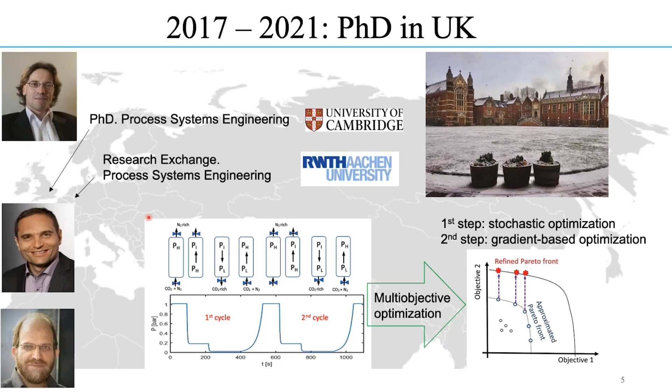And for today's topic, I'm going to talk about... okay, sorry, today's I'm... right here, there's something, yeah.

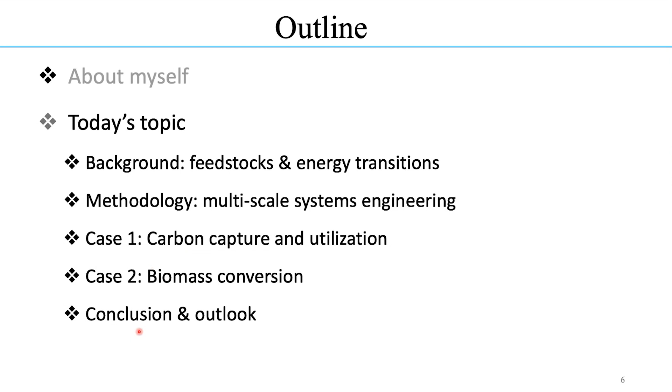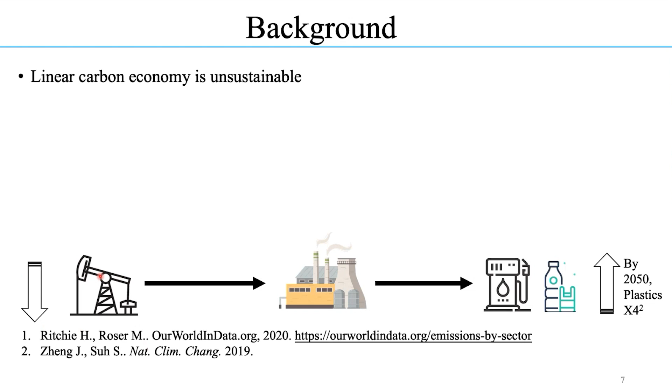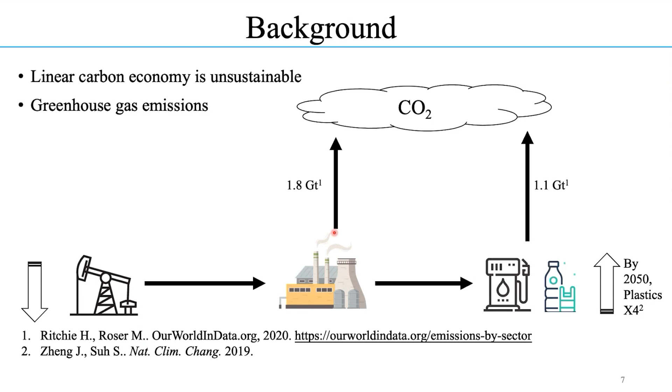Currently, the carbon-based industry is unsustainable. The way it works is a linear production process, starting from fossil fuel. Fossil fuel is not renewable, so the whole storage is decreasing. But in between, when they produce products like plastics or fuels, that also causes greenhouse gas emissions. So this linear way is, of course, not good.

To tackle this challenge, what people normally do is the 3R approach: reduce, reuse, and recycle. That's what environmental engineering generally does. From a chemical engineering perspective, what we are doing is trying to develop carbon capture technology, and also trying to develop renewable carbons like biomass. These are the two cases, two case studies I will talk about later on.

Another thing, probably you know it very well, is for net zero, when we talk about greenhouse gas emissions in different sectors, we can see around 75% of greenhouse gas emissions come from the energy sectors. So net zero, to a large extent, is energy transition.

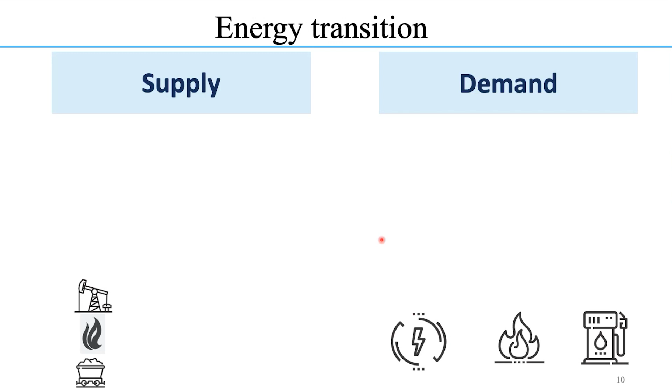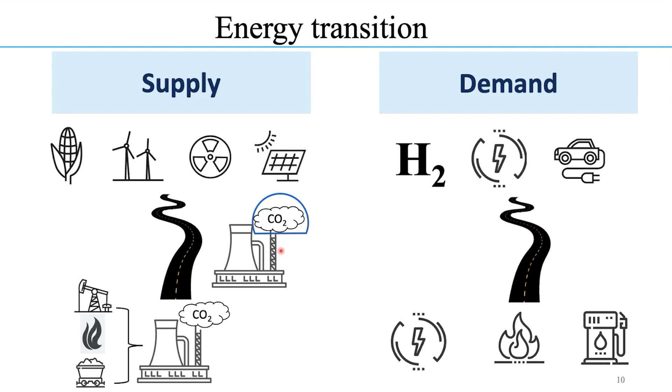Energy transition can be achieved from two sides: from the supply side, transitioning to renewables, and the demand side, through the hydrogen economy or electrifying industry sectors and heating sectors. But the reason carbon capture technology is still needed, at least for the short term, is that maybe not in the EU or Norway, but in fossil-dominant regions like Germany or China, they still need to use coal or gas for power generation. To decarbonize these power plants, we need carbon capture technology to reduce greenhouse gas emissions.

Talking about the methodology we're going to use, that's kind of multi-scale system engineering. Basically that's kind of different scales. First in lab scale, we're trying to find innovations that can change the world or change the whole

carbon transition and energy transition solutions. For example, carbon transition is trying to convert CO2 to fuel products. We develop in chemical engineering, by photocatalyst and electricity or some novel catalyst to

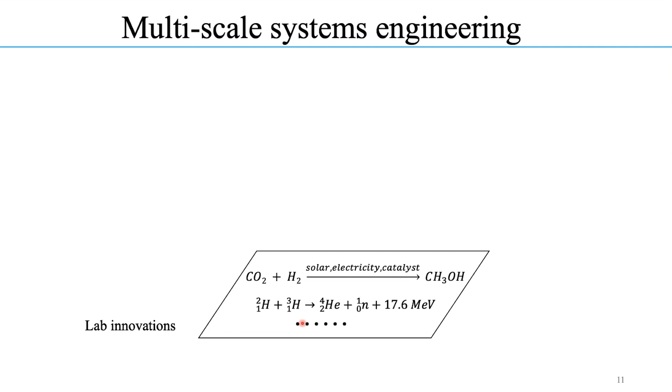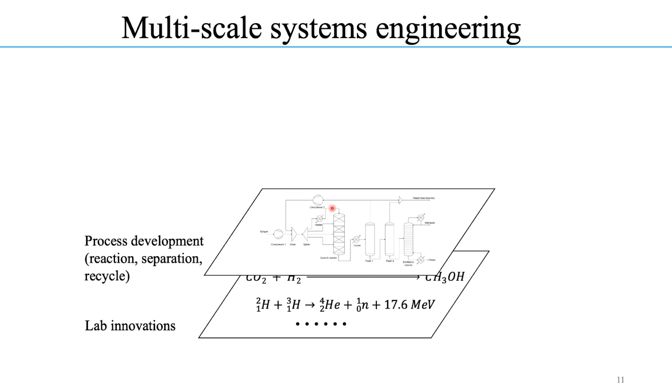achieve this step, and also for the energy sector, try to do something like controllable nuclear technology. Then in process development, we're trying to do process design, develop reaction, separation, and recycle, trying to develop a good, robust process. Then in the whole supply chain level, we go to the regions and the global, trying to do overall system engineering. Finally, we talk about sustainability, which should follow subject to economic and environmental

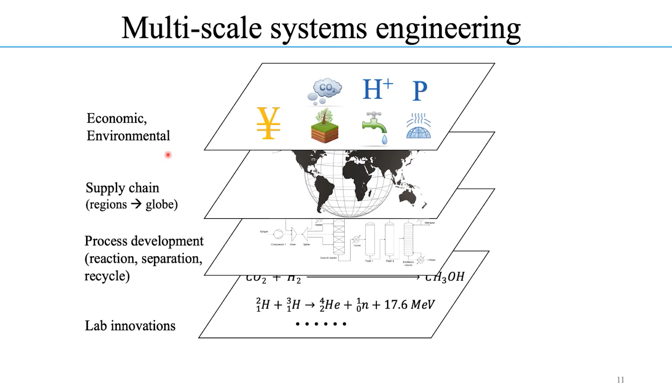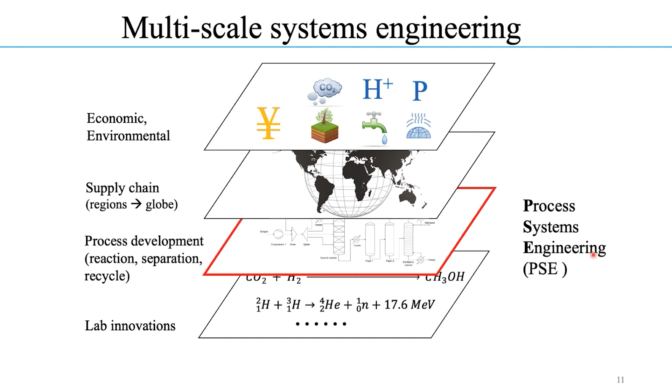constraints or objectives. But today, because my field is chemical engineering, most of my work is focused on process development, and specifically that system engineering field is called process systems engineering, or PSE.

Specifically, PSE is kind of a tool. What this tool can do is facilitate scale-up decisions from lab scales to industry scales.

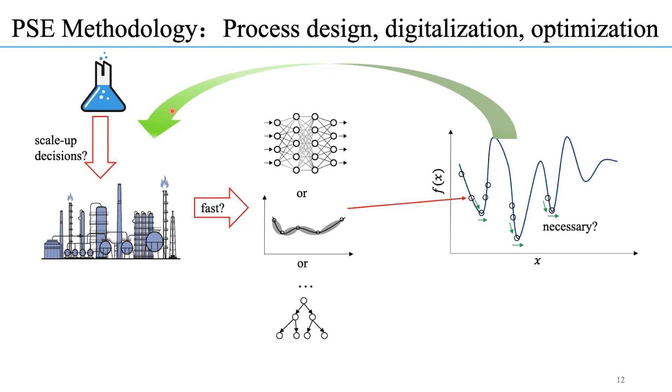Then what we do is digitalize this chemical process using current machine learning technologies, and eventually we do optimization. Then we go back to validate the model and also to accelerate the scale-up

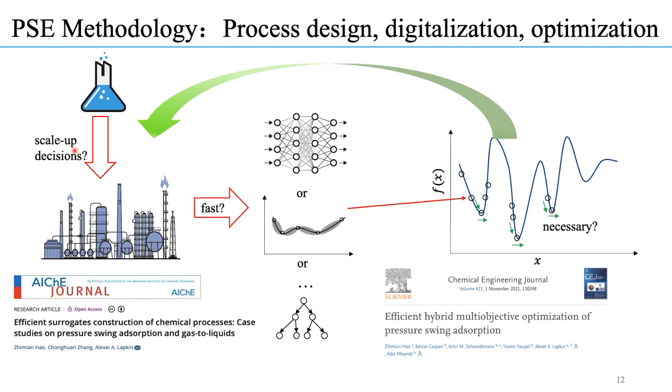decisions. This methodology, I published these papers in the AIChE journal and chemical engineering journal - that's mostly for the methodology. And with this tool, we are trying to solve some problems.

The first case study is what I was doing during my PhD: digitalization and optimization of carbon capture and utilization.

The full chain for the carbon capture technology is called, you probably know, carbon capture, utilization, and storage. Basically what that means is for the carbon source, normally, for example, flue gas in the power plant, then we capture it. Capture means to concentrate the CO2

The second way is trying to convert the captured CO2 to a fuels product, or cement, or plastic. And today's talk, we are trying to focus on this captured CO2 to fuels product pathway. That's the system boundary in this case study.

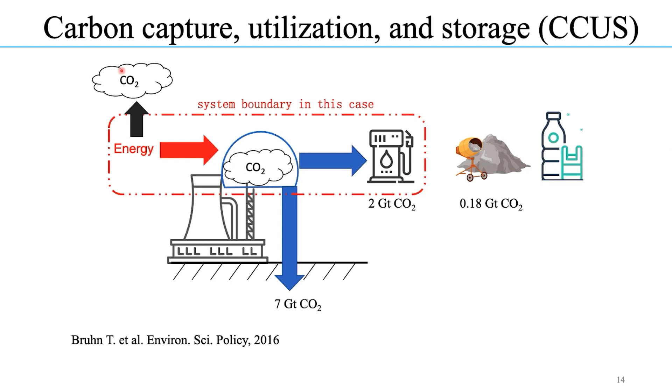Another thing we must understand is that such a pathway also needs energy, and this energy can also cause CO2 emissions. Let's also introduce the research questions.

Just now we talked about how net zero can be equivalent to energy transition. Energy transition technically should be from fossil fuels to renewables. And the reason we use carbon capture technology is we try to decarbonize the fossil fuels.

But currently in academics, especially for the CCU field, people normally consider a general assumption - academics assume they will produce hydrogen from wind or solar, using wind for electrolysis to get the hydrogen, and the hydrogen combined with CO2 to convert

to the fuels. But as we know, this kind of renewable energy can be converted for electric cars and heat pumps, or directly go into the grid. People also mention that the decarbonization efficiency of the routes above is actually much better than the routes below.

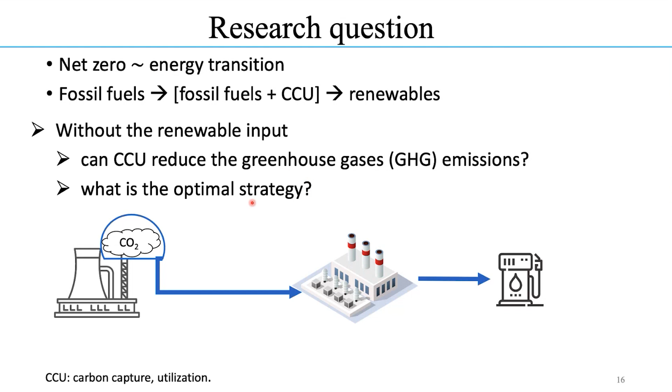So let's go to a more realistic approach. We just say, okay, without the renewable inputs, we want to know whether CCU can reduce greenhouse gas emissions or not. And if this can reduce greenhouse gas emissions, then what will be the optimal strategy? Under such a research question, we designed this industry park.

In this industry park, we include two natural gas power plants with two carbon capture technologies. This capture technology will capture CO2 which will be converted by Fischer-Tropsch and methanol synthesis to get

the fuels product. As you see here, the CO2 conversion needs hydrogen, but the hydrogen comes from steam reforming. So once again, there's no renewables input.

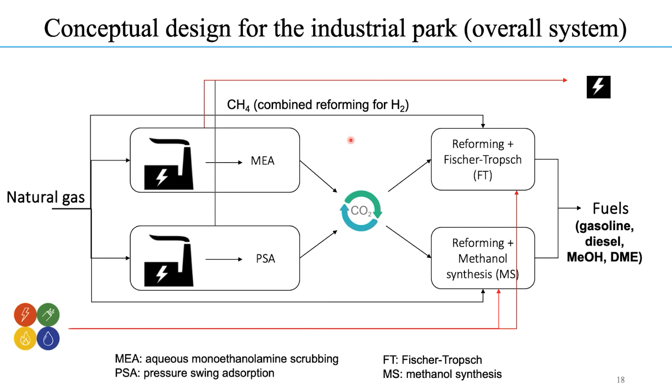For example, for the PSA, we can change the pressure and duration for each stage, and also how we distribute the CO2 to different pathways. ZFT means the portion of CO2 going to the FT routes, and 1 minus ZFT means going to the methanol pathway. We also consider that part of the heating can be provided by low carbon electricity.

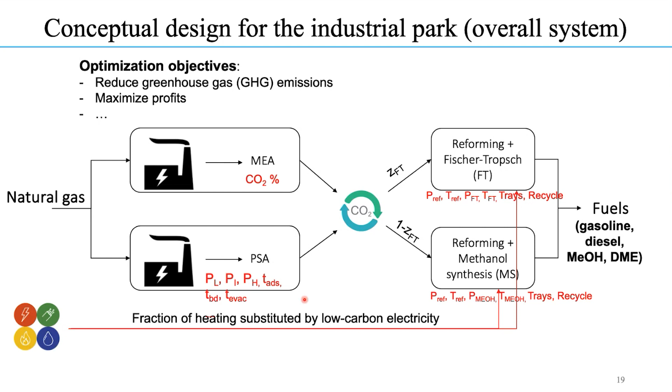When we try to optimize these things, we did process modeling for each sector. For example, for each sector there's a tailored simulator. We try to simulate the subsystem, but we come across some optimization challenges.

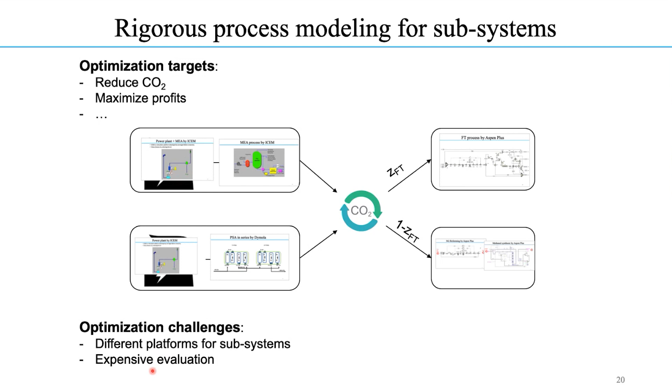For a subsystem, they have a different simulation platform, and with these rigorous simulations, one evaluation can be very expensive. So our way is to use a kind of machine learning based model to represent those systems. This way we can achieve the overall system at one platform, and it's cheap for the optimization evaluation.

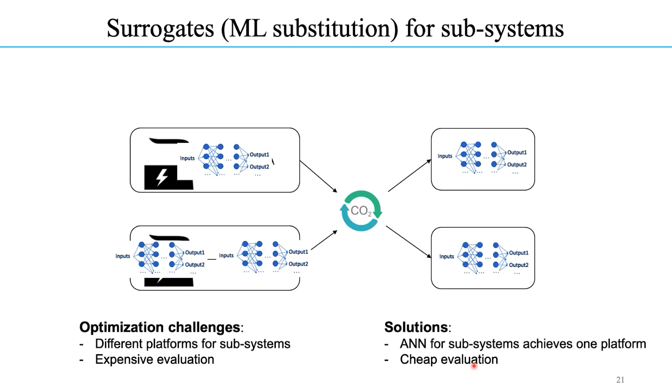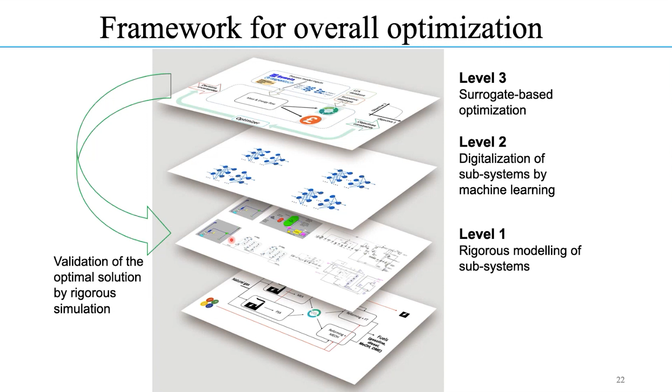So that's the overall framework for the optimization. Level one is still building a rigorous model using rigorous commercial simulators. In level two we digitalize the whole system using machine learning. Then in level three we do surrogate-based optimization, and eventually we validate the results using commercial software for final validation.

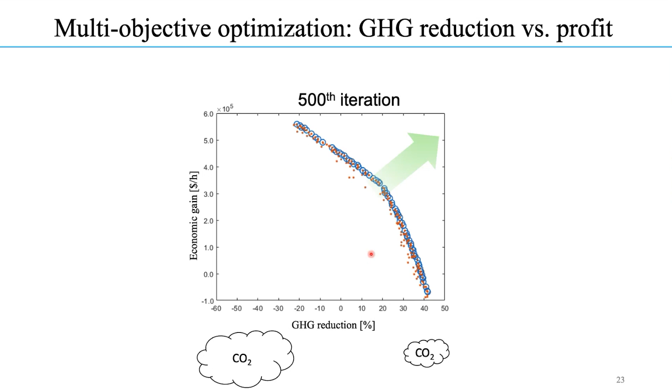This is the kind of result from the multi-objective optimization. The first iteration means when we don't do any optimization - each result is one objective, the x-axis is greenhouse gas reduction, and the y-axis is profit. The red points are available results, and the blue circle means the best case. As we optimize through 5 iterations, 10 iterations, and eventually stop at 500 iterations, we find it's very difficult to improve further.

In this case, when we try to pursue very low greenhouse gas emissions, the corresponding economic gain or profit for the industrial park is actually negative - basically that means the whole industrial park is losing money. If we try to pursue a very high profit instead, we find the greenhouse gas emission reduction is negative. That means converting this CO2 to a useful product actually costs more energy and causes more greenhouse gas emissions. So basically, the CCU actually increases the greenhouse gas emissions.

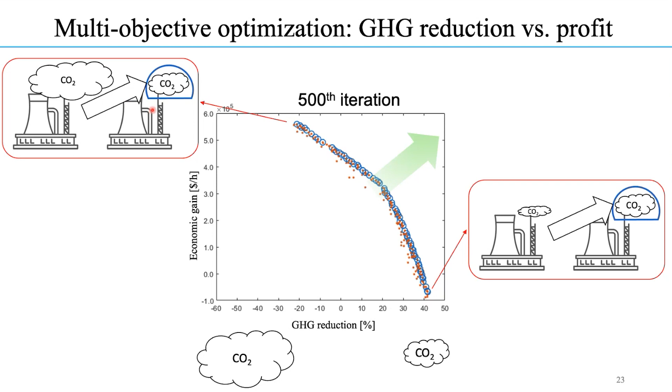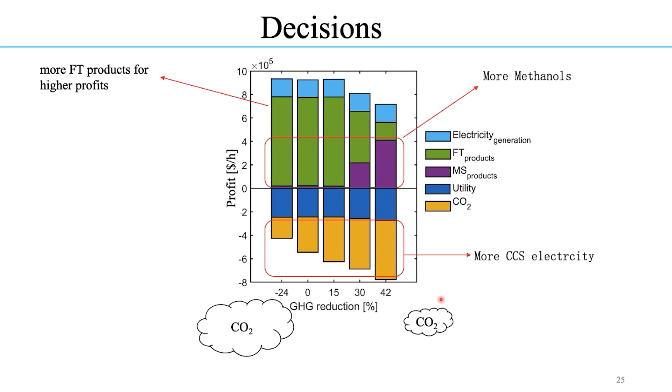If we check the reason why, we selected 5 points - you can see on the left side, those have more Fischer-Tropsch product, meaning more gasoline and diesel. That gives more profit but costs more emissions. On the right, there are more methanol products, which means it reduces more emissions, but also means using more CCS electricity.

So going back to the previous question - can optimization, without renewable inputs, allow CCU to reduce greenhouse gas emissions? The answer is: an optimal CCU is capable of decarbonizing the power plant, but not at maximum profit. And as you may remember, without optimization, a random design can actually cause more greenhouse gas emissions. That's really bad - so basically you try to use CCU to reduce CO2 emissions, but it actually costs more.

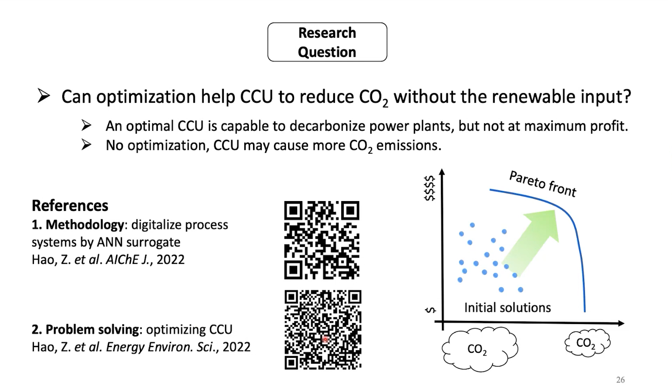If you are interested in this digitalization technology, you can refer to the first barcode, and for the whole optimization problem you can refer to the second barcode for my published paper.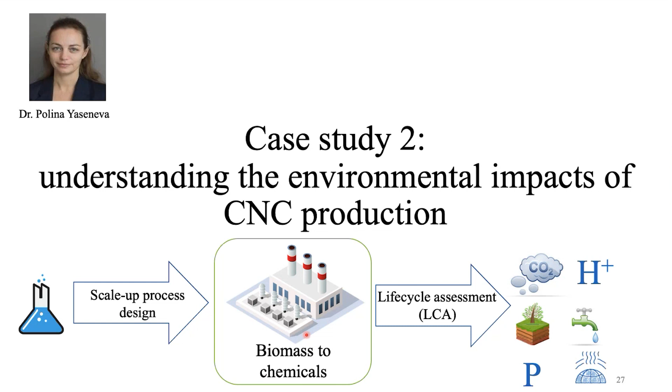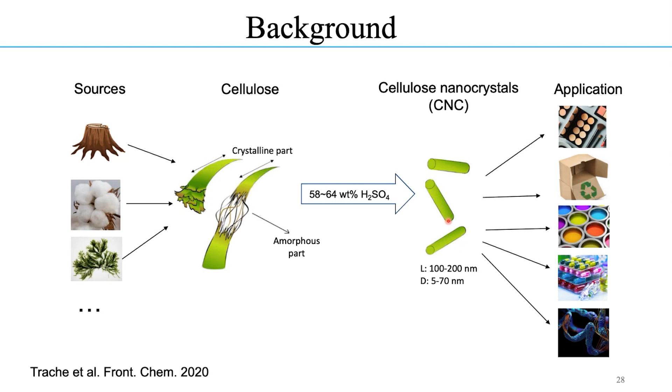The second case study is about biomass conversion, basically trying to scale up lab-scale processes. It starts from biomass, where we try to produce cellulose nanocrystals. Basically, it's a kind of high value-added product with many applications.

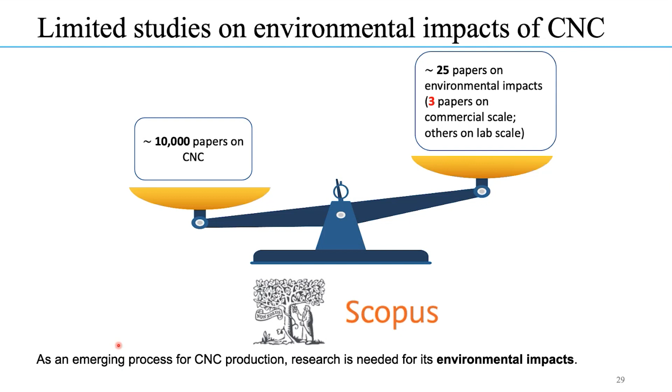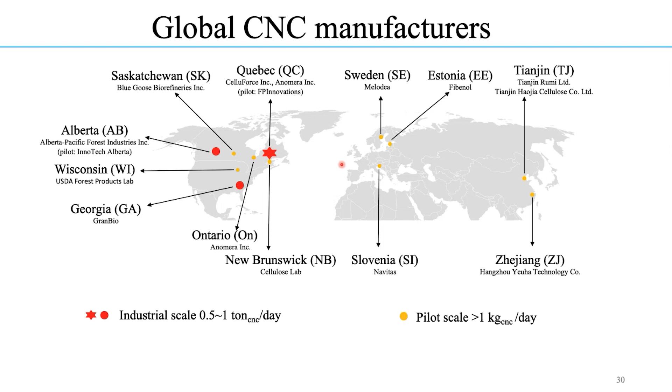But so far there's very limited research in this field about environmental impact, because this is a kind of emerging process and the information is very limited. Still, manufacturers have spread all over the world - the largest plant is in Quebec, Canada, and there are also some pilot plants in other European countries and in Asia.

Firstly, we try to look at this process in Quebec, where they have the largest plant. Basically, this process is actually very simple.

Start from the cellulose, and then finally we try to produce the CNC. So that's the product. In the process, we need to add the acid and water, and eventually we need sodium hydroxide to neutralize the waste stream to pH 7. We are considering a circular design to recycle the acid and water. This way, we can reduce the acid and water use and also reduce the sodium hydroxide. But the cost is increased energy consumption.

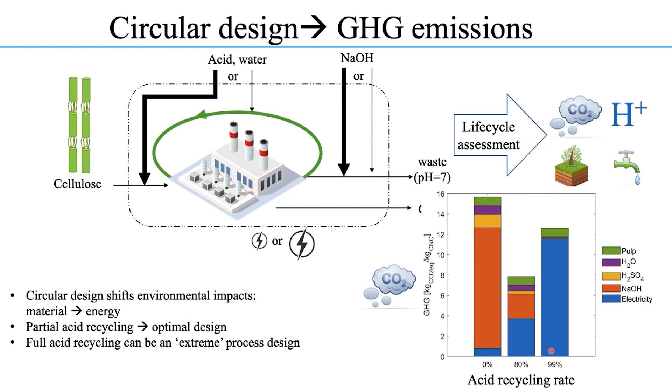Then we try to do a life cycle assessment to check environmental impacts. Here's the result we found: the circular design shifts environmental impacts from the materials input to energy. You can see with no acid recycling, there's a lot of input from materials like sodium hydroxide. When we recycle more acid, there's a lot of burden from the electricity. We also found that partial acid recycling is actually the best, because full acid recycling, like 99%, is kind of an extreme process design.

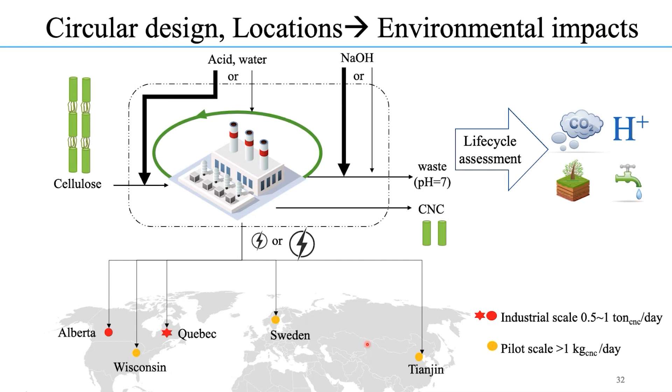We also think about how to arrange this production plant in different regions. For example, we already considered this in Quebec. If we consider this plant in Alberta or Wisconsin in the US, or Sweden, Nordic countries, and also in Tianjin, China, we see the result again. So Quebec is the result I showed before. You can see if we put this plant in other countries, the results can be super different. That's compared against an existing pilot plant.

So basically the benchmark is like 30 to 50. That means if in low carbon regions like Norway, Sweden, or Quebec, we may consider extensive circular design or recycling design, but for fossil-dependent regions like Alberta, Wisconsin, or Tianjin, it actually benefits from limited acid recycling design. That's related to the regional energy profile. Quebec has a lot of hydropower, and Sweden has a lot of hydro and nuclear, but Tianjin, for example, has a lot of coal.

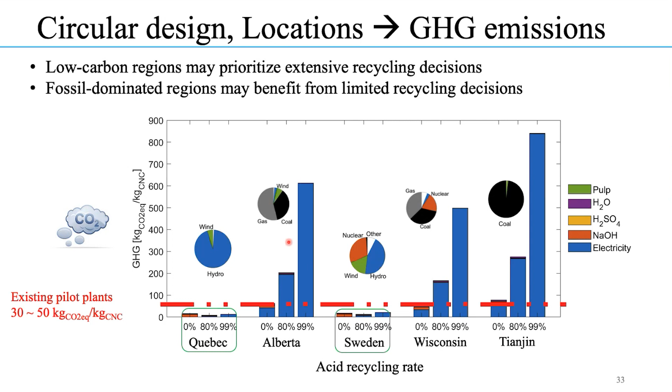We see these results because this work was done in collaboration with a Canadian company in Alberta. They already developed a very nice, promising product. Then they tried to expand their business, so they asked: should we choose Quebec or Sweden? In Alberta, energy consumption still couples with greenhouse gas emissions, but for these two regions, energy consumption decouples from greenhouse gas emissions.

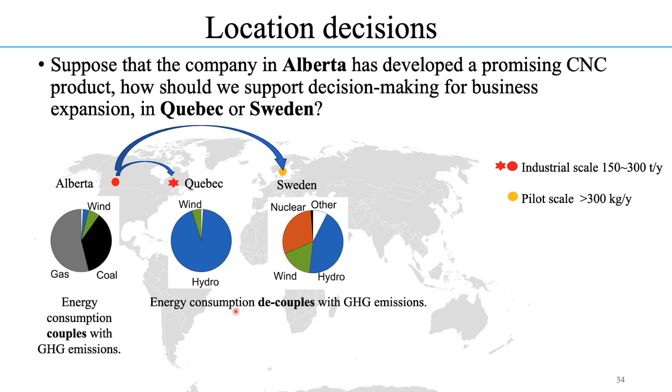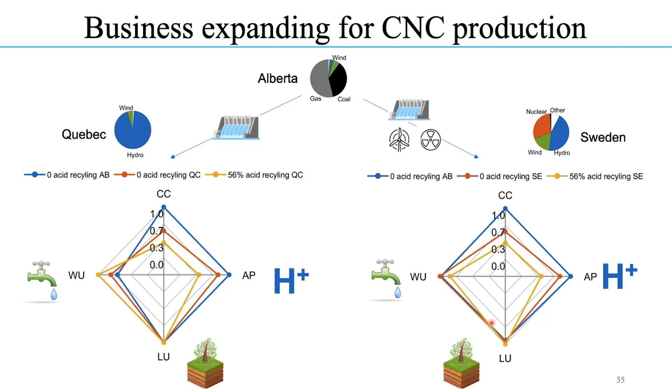Hello, did you call me? No, there is no question. Please continue. Okay, sorry.

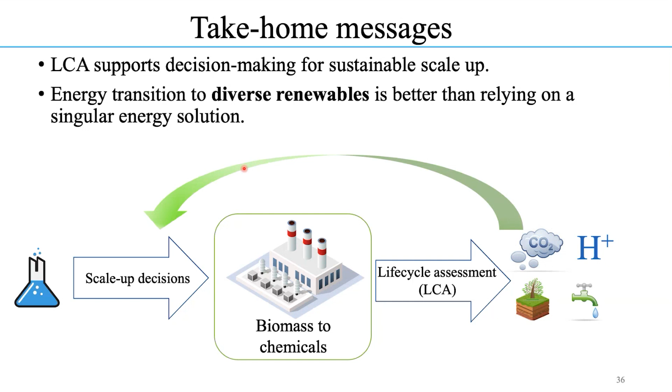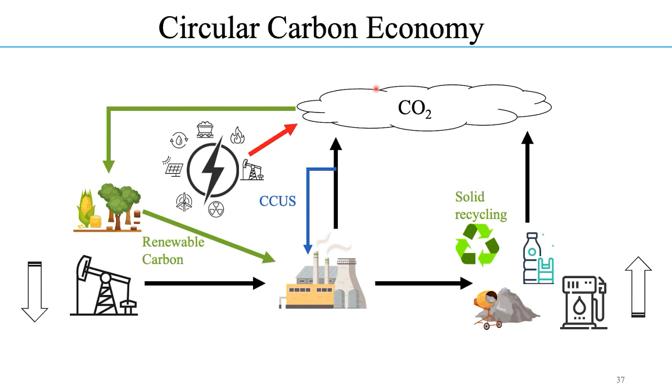The energy transition should move toward diverse renewables, which is better than relying on a singular energy solution. Overall, when we go back to the circular carbon economy, all of the pathways seem unable to avoid energy consumption, and that energy consumption really depends on the regional energy profiles—where the energy comes from. Eventually, the overall system analysis can show how greenhouse gas emissions are reduced or not, and that's the final conclusion.

Especially for fossil-dependent regions, the decarbonization technology is preferred not to be energy intensive, and the evaluation criteria should be better developed as diverse criteria. The methodology we are trying to develop is to build process modeling, which will give results super different from a linear scale-up of lab scale innovations. Also, machine learning accelerates the evaluation of large systems, and multi-objective optimization or multi-criteria decision making can support conflicting decision making processes. That's overall what I wanted to show for today.